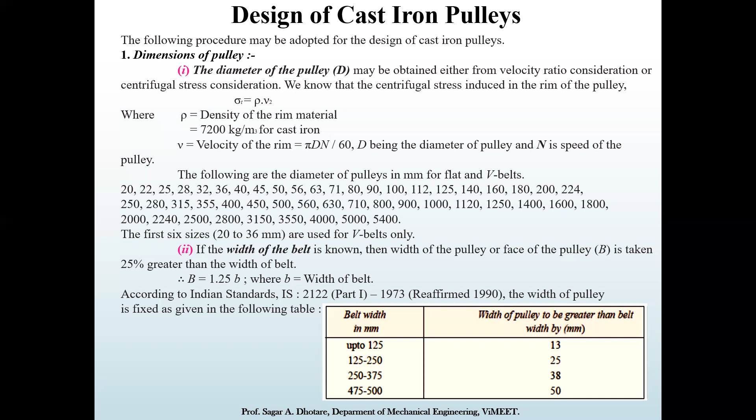So up to 125 diameter of the belt width, we need to increase, or add 13 to the width, so your belt can be easily mounted. Similarly the details are given further; up to 500 we need to add 50.

For mild steel pulleys, the width given starts from 16 to 630, because manufacturing of these pressed steels is quite difficult, so generally we are using cast pulleys. The thickness of the pulley rim varies from D by 300 plus 2 to D divided by 200 plus 3 for single belt, and for double belt it is D divided by 200 plus 6. This is a generic empirical relation we can use for calculating the thickness of the pulley.

Then, dimensions of arm: first we need to identify the number of arms. Previously we have seen a chart where, based on the diameter, the number of arms has been suggested. In general, you can consider 4 arms for diameter from 200 to 600, and 6 arms from diameter 600 to 1500. If the pulley is lesser than 200 mm, then a solid disc is inserted instead of arms, and the thickness of the solid disc is taken equal to the thickness of the rim measured at the center of the pulley face.

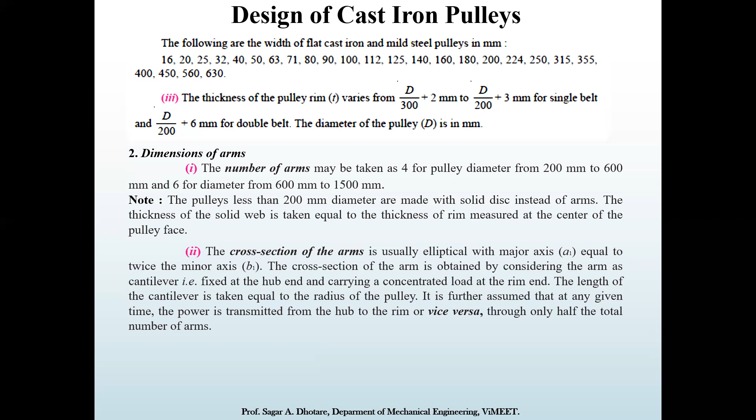Then some load calculations we need to do. So torque or tangential load we can calculate by using torque transmitted divided by radius of pulley into the number of arms by 2. The equation simplifies to 2T divided by r into n, and the maximum bending moment which we can calculate it

at the arm, we need to multiply that tangential load by radius, that is a distance. So the equation becomes 2T divided by n.

Then section modulus, as we are using elliptical sections, the value of section modulus Z is equal to pi by 32 into b1 into a1 square.

By using these equations you can calculate the loads acting on the arm. The arms are tapered from hub to rim. The taper value is usually 1 by 48 to 1 by 32, and when the width of the pulley exceeds the diameter of the pulley, then 2 rows of arms are provided, as shown in figure number 20, to avoid a heavy arm in a single row. So as we apply number of rows, it will carry load separately, and rather than using a heavy arm, we are using 2 lighter arms for the same configuration.

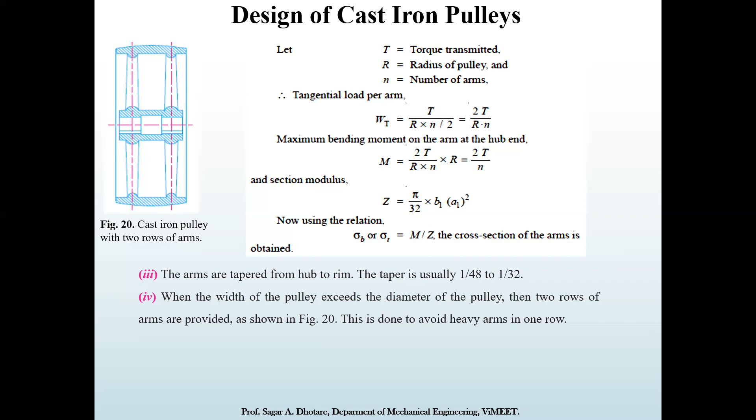Then dimension of hub: the empirical relation is given as d1 is equal to 1.5d plus 25 mm, and it should not be greater than 2d. So whatever the diameter of the shaft, the value of the hub should not be greater than 2 times the diameter of the shaft.

Then the length of hub is equal to pi by 2 into d, that is the diameter of the shaft. The minimum length of the hub is 2/3 of the width of pulley, and it should not exceed that.

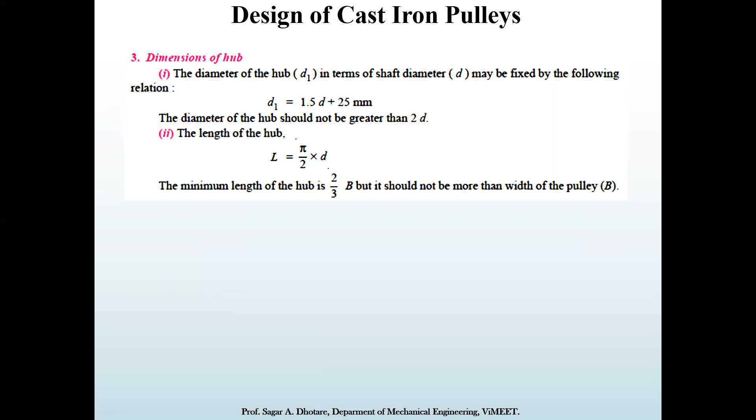Now V-belt: as we know, the V-belt is mostly used in factories and workshops where a great amount of power is to be transmitted from one pulley to another, and the center distance is less. These V-belts are generally made from fabrics and cords.

You can refer figure number 21, section figure A. The fabric and cords are impregnated with rubber and covered with fabric and rubber, so we can see the layers are different: a rubber layer, then a cord layer, then a fabric layer above, and the final layer is a fabric plus rubber cover.

The inclination angle of the V-belt is usually from 30 to 40 degrees, and power is transmitted by the wedging action because it is connected with the end side walls. So there is a wedging action between the belt and the V-groove in the pulley or sheave. This wedging action of the V-belt in the groove of the pulley results in a higher force of friction.

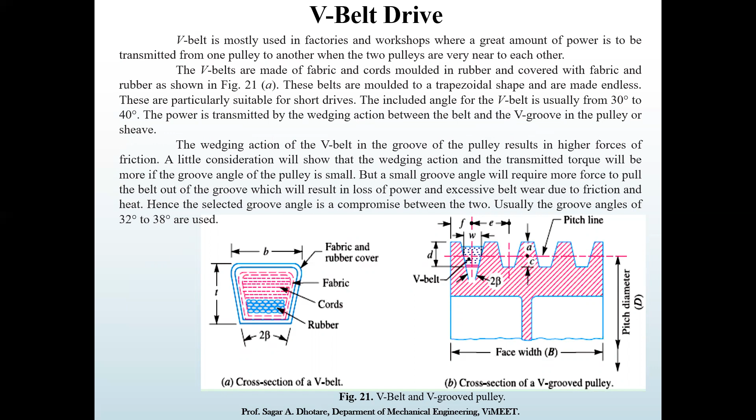Now a clearance must be provided at the bottom of the groove, shown in figure number 21b, because there should be some gap so that air can pass and it can be cooled, and in order to prevent touching of the bottom as it becomes narrow from wear, which could otherwise increase.

The V-belt drive may be inclined at any angle with the tight side, either at the top or bottom. In order to increase the power output, several V-belt drives may be operated side by side, and it may be noted that in a multiple V-belt drive, all belts should be stretched at the same rate so that the load is equally divided between them.

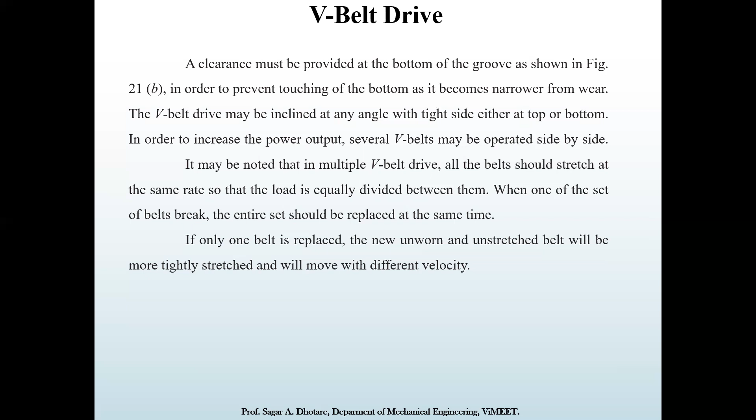So there are few types of V belts and pulleys according to Indian standard. There are 5 types: A, B, C, D, E, based on the power ranging. It starts from 0.7 to 350 kilowatt. As they have prepared a cross section, based on that, the types of V belt is done. The ranges are given, you can refer.

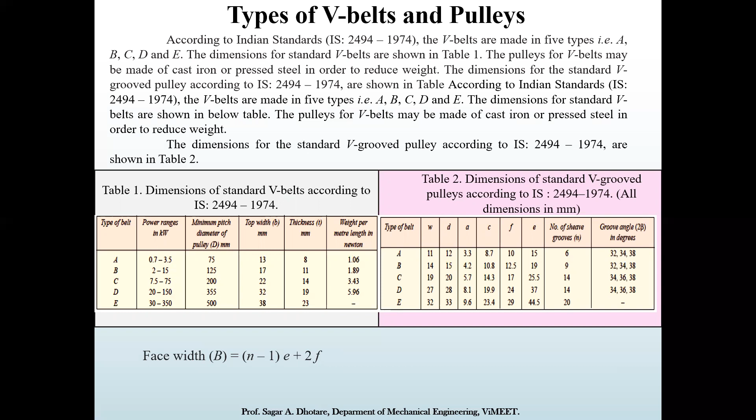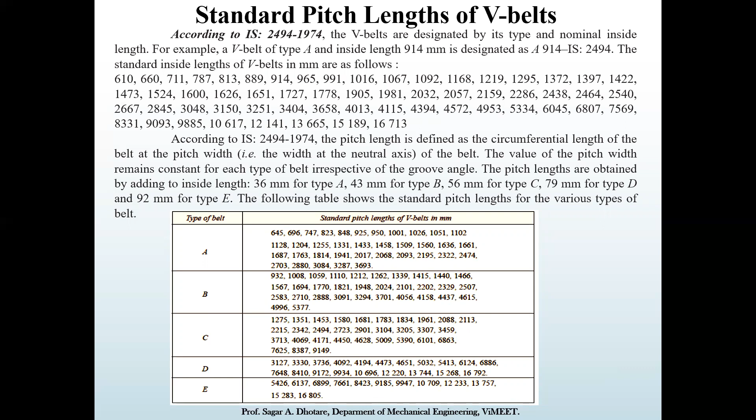Then the standard pitch length of the V-belt. The V-belt is also manufactured in a non-standard pitch length, that is oversized or undersized. The standard pitch length belt is designated by the grade number 50. The oversized belt is designated by grade number more than 50, and undersized by lesser than 50. It means that 1 unit of the grade number represents 2.5 mm difference from the nominal pitch length.

We will discuss an example. If the V belt is marked A914-50, it denotes that the inside length of the belt is 914 mm and pitch length is 950. So a belt marked A914-52 is oversized, as we discussed. If it is 50, then it is a regular one. If greater than 50, it is oversized, and less than 50, it is undersized. So it is oversized by 2 units of the grade number, since the difference between 52 and 50 is 2. Since the unit of grade number represents 2.5 mm, the value is 2 into 2.5, that is 5 mm, which can be added into the nominal pitch length, that is 950.

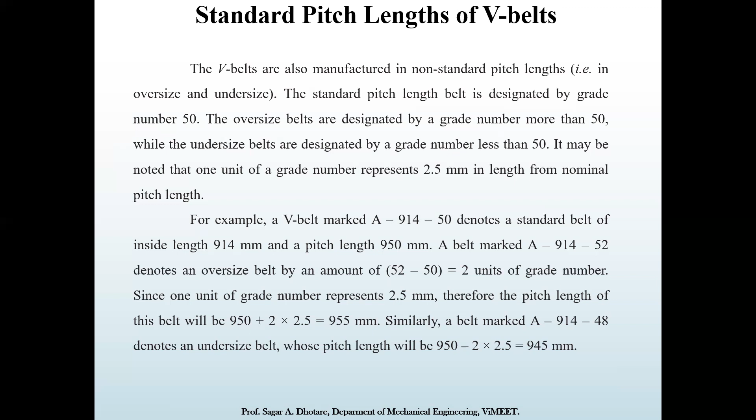Now the ratio of driving tension for V belt. While calculating the belt, we need to identify the tensions generated inside. R1 is the normal reaction between the belt and side of grooves. R is the total reaction in the plane of groove, shown in figure number 22. Mu is the coefficient of friction between belt and side of the grooves. For resolving reaction, R equals R1 sine beta plus R1 sine beta, where 2 beta is the angle between two side walls. From that you can find the value of R1, that is R divided by 2 sine beta.

Now from the frictional forces, we can calculate friction force, that is equal to twice mu into reaction R1. So you can find the value, that is mu R cosec beta, since 1 upon 2 sine beta is nothing but cosec beta.

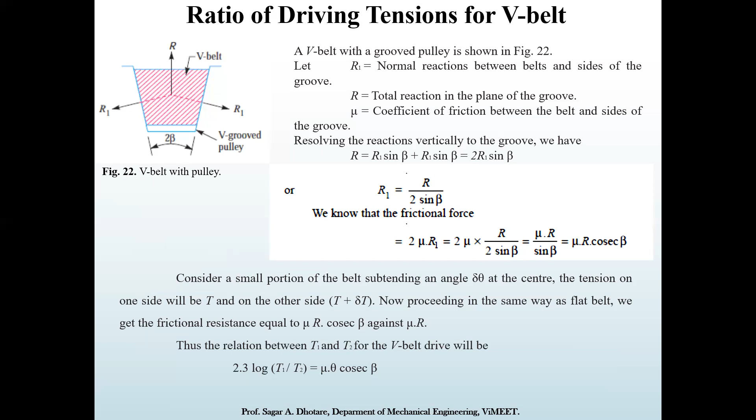Considering a small portion of the belt subtending an angle of delta, there is a variation in angle at the center. The tension on one side will be T, on the other side will be T plus delta T. We can directly find the relation based on the logarithmic way: 2.3 log of T1 divided by T2 equals mu theta cosec beta. In this way you can find the tension in V belt drive.

Now we need to identify the advantages and disadvantages, or comparison between V belt drive and flat belt drive. First, discuss the advantages of V belt drive over flat belt drive. The V belt drive gives compactness due to the small distance between the centers of the pulley, making it very compact in design. Then this drive is more positive, it can transmit more torque, and has negligible slip between belt and pulley compared to the flat belt.

So V belts are made endless and there is no joint, therefore the operation will be smooth, with no fluctuating noise.

So another, it provides longer life, up to 3 to 5 years. As we know, if joints are not there, then the chances of failure will be reduced. So the life of a V-belt drive is more than that of a flat belt drive for the same range. It can be easily installed and removed.

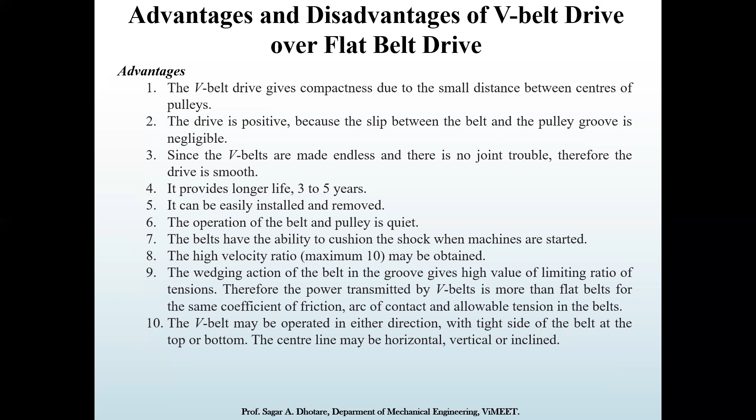Then a few disadvantages are there over the flat belt. We cannot use it for larger distances because the weight per unit length will get increased. If you compare the cross section, the thickness of the V-belt is more as compared to the flat belt. Now, V-belts are not as durable as flat belts. Durable means it cannot be used for a long run. So the durability of the V-belt is very less as compared to the flat belt. It is endless, so we cannot use it again and again. That is the basic drawback of V-belt drive. If it is loosened once, we just need to replace it.

In flat belt drive, we can introduce a joint. We can just cut down the excess length, join the ends again and use it. So that drawback is there with the V-belt drive. The construction of pulleys for V-belt is more complicated than that of the pulley of the flat belt drive. We have to introduce grooves with a particular angle. If it is not at a particular angle, there is a possibility of friction and so on. So we have to prepare a special type of casting, or go with machining to achieve the proper surface strength. That's why the construction of the V-belt pulley is more complicated.